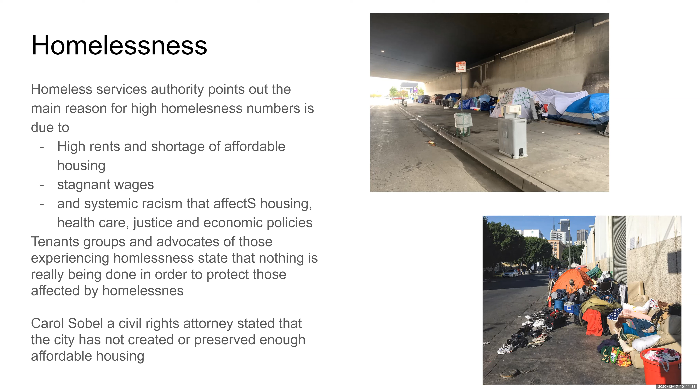The Homeless Service Authority points out that the main reasons for homelessness are high rents and shortage of affordable housing, stagnant wages, and systemic racism that affects housing, healthcare, justice, and economic policies. Many tenant groups and advocates for those currently experiencing homelessness have said that nothing is really being done to protect the homeless. That's why we came up with this idea, because we want to help those in need and those that really need a home.

These are just some stats showing where homeless people are sleeping. Most of them are sleeping out in the open, in emergency shelters even though there aren't a lot, in motorhomes, vans, tents, and cars. The LA County homeless population has increased drastically.

I'm going to go ahead and talk about our inspirations, what drove us to come up with the design that we came up with. The first one is the Eames House, Case Study House number 8.

Case Study 8 is one of roughly 24 homes built as part of the Case Study House program. The architects are Ray and Charles Eames, the style is mid-20th century modern, and the location is Pacific Palisades, Los Angeles, California. The houses were built and furnished using materials and techniques derived from experiences of the Second World War.

I believe that relates to us, because in a way a lot of the people who are homeless want a home, and we should help them equally, because I feel everyone is equal and everyone deserves to have a nice home. Like Professor Oliva has said, just because it's cheap doesn't mean it doesn't have to be designed well. We have the ability to do that, and I feel like this is a great example.

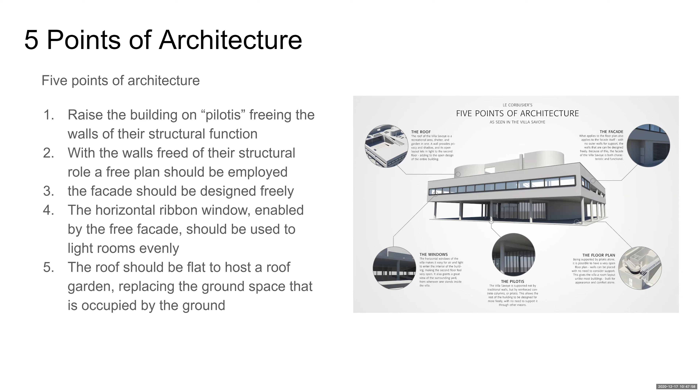In addition, this is a great example. The Villa Savoye is a true demonstration of the 5 points of architecture because it basically has the pilotis, the window, the roof, the roof garden.

This house was completed in 1931. Its main living spaces are raised off the ground. The lower level is dedicated to the maintenance and service programming of the house, and it is a machine for living in.

So another concept we learned during the class was biophilia, and I feel like this is the most important one we learned. What is biophilia? It is the connection between a building and nature. Biophilic design helps reduce stress, enhance creativity and clarity. It is a relationship that is essential for us to sustain our health and well-being.

The economics of biophilia estimates that providing American hospital patients with views of nature can save up to 93 million per year. It is a combination of science, design, and touch.

There are many examples of biophilia, and some of these designs were incorporated into our multi-unit. The first one can be direct physical ephemeral presence of nature in a certain space or location: plants, flower beds, butterfly gardens, water features such as fountains and aquariums, green walls, and vegetable roofs.

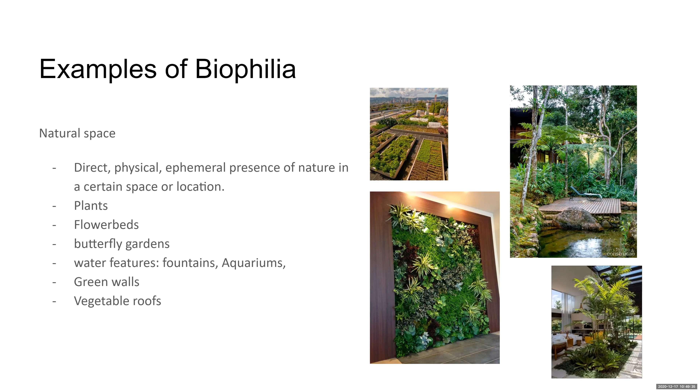The visual connection with nature is basically a view to elements of nature, system, and natural processes. Spaces have a view of nature, natural systems, or living elements. It helps reduce stress, increase positivity, emotional function, improve concentration, and expedited healing rates. And it obviously will not bore people with the view that they're having.

So our multi-unit—this is where we all kind of gather, we put everything that we learned throughout the semester and we created this.

Our multi-unit is either 3-4 complexes, or 4 on a site of 150 feet by 50. Each unit is 30 feet by 25. Each complex has 4 floors.

First floor consists of an area to exercise and entertainment. Second floor consists of the kitchen, half bathroom, laundry, living room, and dining room. Third floor consists of 2 bedrooms, a full bathroom, an office and balcony. Fourth floor consists of an entertainment area and a roof garden where vegetables can be grown.

All of the units are connected by a CMU wall that will also be a green wall. The units all have prefabricated, customized green curtain walls.

This image shows what we would be picturing for our multi-unit if it actually was built. For example, we can have a balcony with plants, something that can be like an escape room for people to get out and enjoy nature, because we live in the city and don't get a lot of that. I feel like if we can bring it to our homes, it would honestly make a difference.

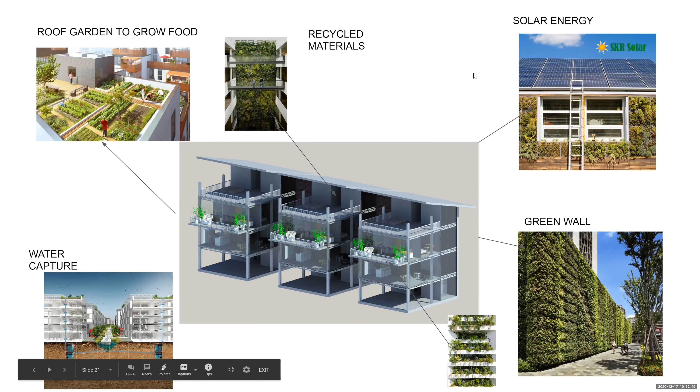Our next task is to consider the different types of multi-unit houses. With us is Brooke.

Thank you, Professor. My name is Brooke, and earlier we discussed the multifamily housing unit in depth based on our project. Right now we'll look at the types of multifamily housing units. Let me start by explaining what a multifamily housing unit is.

At a municipal level, a multifamily housing unit is also called an MDU, referring to multi-dwelling units. A multifamily house is a space composed of multiple separate housing units combined in one or several buildings in a single complex.

So I'll move into the types of multifamily housing units. The first is a duplex. A duplex is one building divided into two separate living units, as you can see on the plan. They have separate entrances, and there's usually no common area inside. Each unit has its own garage, its own space arrangement, and its own living areas.

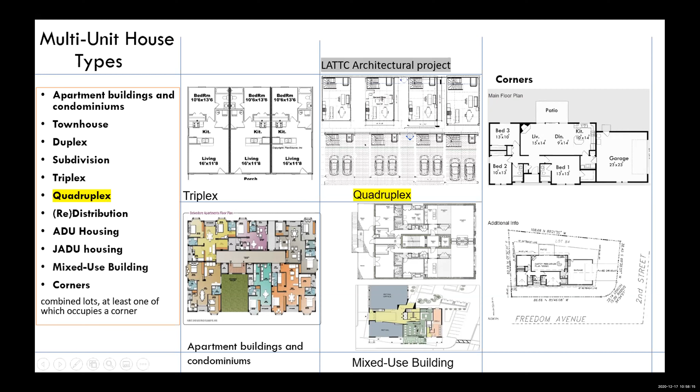Similar to this, we can move to redistribution based more on the units and their classified names. Thank you very much, Brooke.

Thank you so much. Now we're going to move to regulations, codes, and variables, and how we start with a parcel. For that, we're going to have Daniel Ramos.

Thank you, Brooke. Okay, so we're going to move to actually how you start thinking about locating your building on your site. For that, we have Edward Tenoyan.

Hi, I'm Edward Tenoyan, and I'm going to be talking about the grid and also the concrete slab on the ground floor, and how to demonstrate it on Revit.

The grid in construction documents is a series of interlocking lines, both horizontal and vertical, equal distance from each other, mostly used for organizational purposes. They help in creating construction documents by serving as a guiding line and providing precise measurements, forming the organizational system of the components.

Drawing the grid is usually the first step in the process, and it influences your entire layout in the project. During the construction phase, the grid is a reference for locating specific components on the site and attributing them with a location. For example, if you're building a structural column, you can easily locate it by referring to the grid, such as 3H.

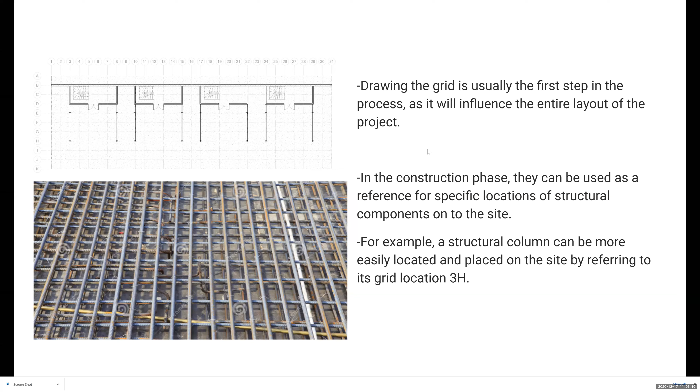As far as design goes, the Eames House, which our design is based on, makes use of the grid, which has been used throughout architectural history mostly as a pattern of organization for the designer. The Eames House uses the grid throughout its layout and the placement of structural members. The modular design is based on a grid formation, creating a system of standardization that retains proportion and harmony throughout the structure. Le Corbusier also made use of the grid and stressed its importance.

He also elaborated the use of the grid by adding an anthropometric dimension, which basically takes into account the human scale.

As far as concrete slabs go, we're going to be adding a monolithic concrete slab, which encompasses the entire property. Concrete slabs for foundational purposes are usually 4 to 6 inches thick. They're a fast and efficient way of creating a foundation. It can be poured all at once.

The concrete slab is generally positioned on a layer of sand in order to improve drainage conditions, and it also acts as a cushion. The ground underneath has to be at grade. It has to be a flat surface, and take into account that there's not going to be a crawl space or a basement, and it's not recommended for cold climates. This is a detail of a concrete slab with a CMU unit that's attached.

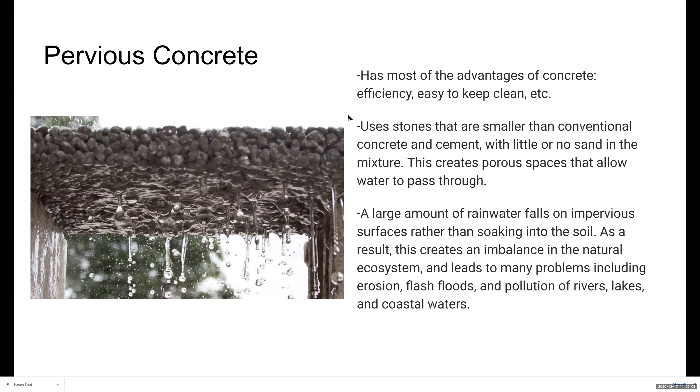Finally, because we're putting a concrete slab over the entire property, we decided to have a pervious material as the concrete, mostly for water strategy purposes. It's going to ensure that water actually penetrates the concrete and goes into the ground instead of being runoff that contaminates the ocean. There's all sorts of new technologies that create an aggregate which is more loose, that allows water to seep through instead of infiltrating our water supply.

As we have mentioned, you're not only going to learn about the concept and the knowledge of architecture and engineering, but we're going to show you how to do it on Revit.

I opened up a blank architectural template on Revit, and I'm going to start by placing the grid. We're going to make sure that we're in the architecture tab, and under datum, we're going to select grid.

Now we're going to approximate the location of our grid, and in this case, you can always edit it afterwards, but I'm going to start placing the first line in this bottom left corner where I know it's going to start. I'm going to start with the vertical lines first. I'm going to click, then drag my mouse up, and click again. Now I'm going to press the escape key twice.

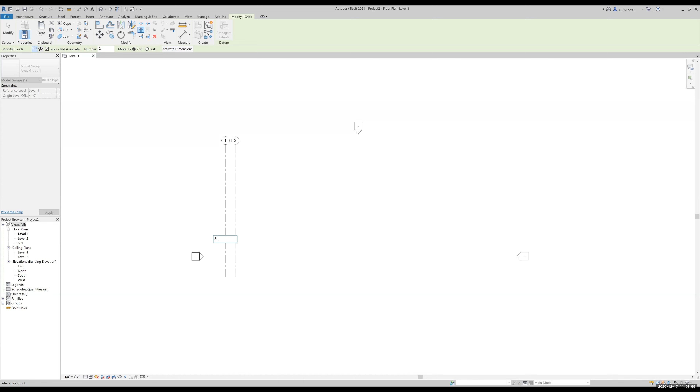I'm going to select the grid that I just created, and under modify, select array. Next, I'm going to click on the grid again and drag my mouse to the right until it says 5 feet. I'll click, and under the entry box where it says the number 2, I'm going to type in the number of lines that I want—in this case, 31. Typing that in and pressing enter, you can see that it created 31 lines.

Now I'm going to do the horizontal lines. I'll click on the architecture tab again, go to datum, press grid. I'm going to start in the upper right hand corner this time to drag it to the left. I click, drag, click again, and press the escape key twice.

Next, I'm going to change this 32 to be an A so that there's letters on one side and numbers on the other side. That makes it easier to read the grid. I'm going to click on the 32, type in A, and press enter.

Then I'm going to click on this grid line, select array under modify again. I'm going to click on the line A, drag it down 5 feet, click again, and in this case type in 11 lines.

I'm going to click outside of the grid, and so now we have the basic layout of the property.

If we want to edit and clean it up, we can do that. I'm just going to select these lines over here, click ungroup. Now when I select one of the grids, this little circle will pop up. I can move that and that'll clean it up.

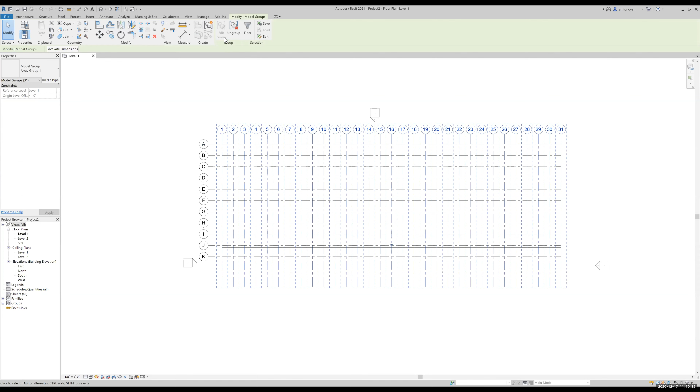I can do the same thing to these vertical lines: select them, click ungroup, click the circle, and drag it.

So now if you want the grid lines to be halftone so that they're not as cumbersome when you're drawing out the construction documents, go to visibility/graphics under the properties, click edit, go to annotation categories, scroll down until you see grids, and on the right side, check halftone, press OK.

Now I'm going to draw the model line for the entire property as well as the individual units. Under the architecture tab, under model, I'm going to select model line. Under draw, I'm clicking on rectangle, starting in the upper left. I can also change the line style to be wide lines, which I'm going to do in this case, just to make it more visible.

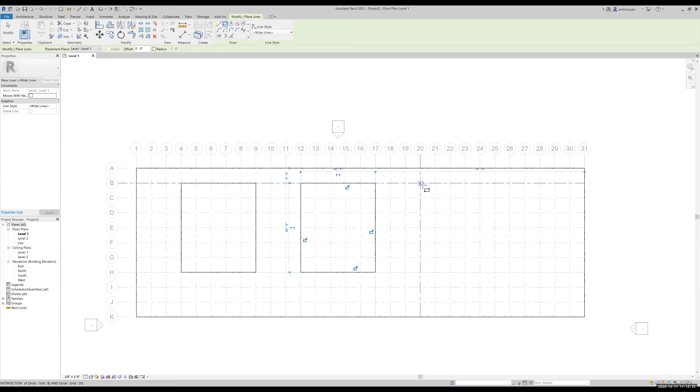Now I'm going to do the individual units. We decided on ultimately doing a 4-plex, but in this case, I'm going to do 3 units. You can see how the grid makes it easier to define the measurements of each structure, which is 25 by 30, and they're going to have 15 feet in between. It really depends on how much space you want to leave between the units and how close you want them to be.

So I'm going to press the escape key twice. Now for the slab, which takes up the entire property, I'm going to click on structure. Under foundation, I'm clicking slab. Under draw, I'm going to click on the rectangle, and I'm going to do the same thing: clicking, dragging, click again, and click on the green check mark. Now, as you can see in 3D view, there's your slab. And that's it.

Professor, you're muted. Thank you very much, Angelica.

So now that we know the parcel, we know the footprint of the building, we learned that the grid helps us locate the spacing and the modularity. Now we're going to move to number 2.

One of the things that is very exciting about our project is that we have a CMU that covers almost the entire site, because it connects the 3 units. For that, we're going to have Delson talk to us about our CMU exterior wall.

So I have put together a quick presentation on what CMU is, for those that do not understand. CMU is just a concrete masonry unit, CMU for short. They're usually versatile blocks made out of concrete that can be used both for structural and aesthetic looks. They serve both purposes. They're a great material to use because they're so versatile.

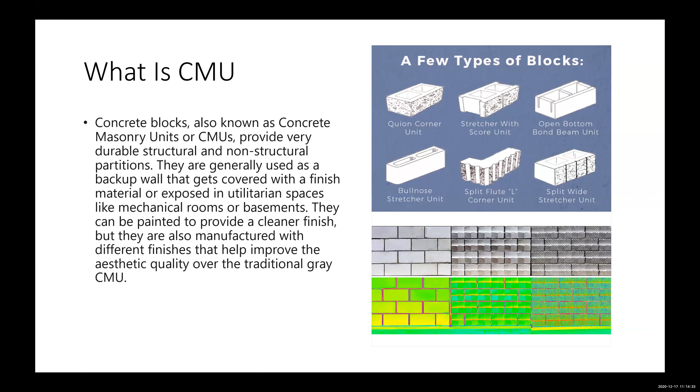Building with them is a little more tricky and time consuming, but they last a very long time. And happily, we're going to use them in this project for a big portion of the project.

So a little bit of the properties of a CMU: it is really thermal. It does absorb a lot of its exterior temperature and can retain temperature very well, releasing it at night and warming up in the daytime. So you can keep your interior temperatures more warm without having to actually have AC or much ventilation. It's really good for insulating. It does not mold, it does not rot, so that's why it lasts so long.

This CMU wall will be placed near our elevator, which works perfectly there because, as it says here, CMU is fire rated. This means it is 2-hour rated for fire protection, so it takes 2 hours for fire to get through the CMU, and it is by code that we will need that for our elevators.

Where I got our CMU is from BIMsmith Market. This is a great website that you guys can go to, where you can get free CMU add-ins to your project. I didn't write it down, but I used Oldcastle. They are a company that has insulated CMUs as well, so I thought it was a good addition to our project because it will add another layer of insulation. BIMsmith is really easy to use, free to download, and has a great variety of not just CMU, but appliances and other crucial components for your project.

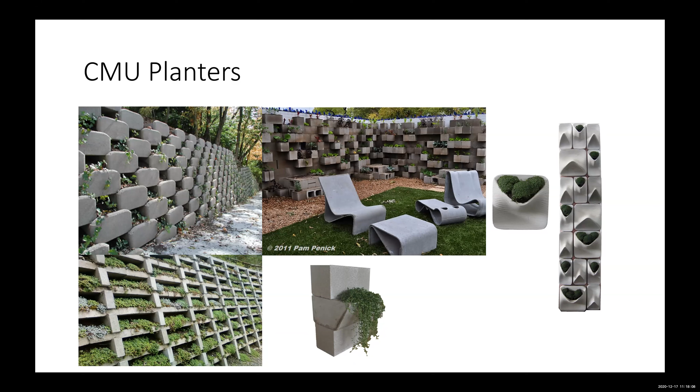Now we're going to learn how to do it on Revit. As you can see, CMU can give us texture, colors, patterns. We can create niches and openings. And now this is the way you would do it.

In this project, I have already brought in this CMU wall, which has already been fitted with texture and the CMU that we will be using in this project, as you guys can see. But I will show you guys how we can input it.

If I click on the CMU here, we can start a new one. So we're gonna start a new one from here. I'm just gonna duplicate this so I do not override my generic that I have in our files. And we're gonna go here into the structural. As you guys can see, we only have structural and the thickness. We have no actual material used here. So I will be actually adding this in.

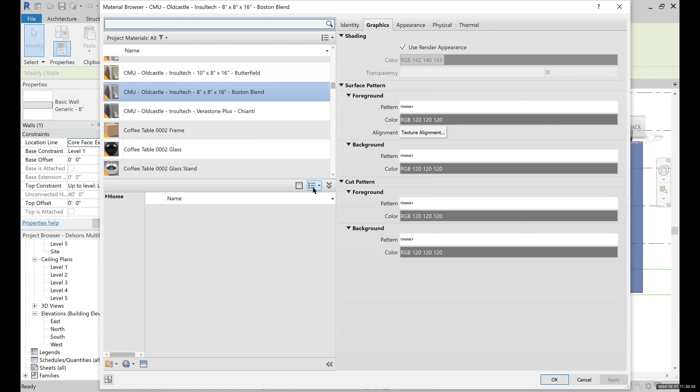I will click on these three little dots, which will open my material browser. Here we have the three different CMUs I have brought into the project that we can use. But if I would not like these three, I can come down here and click on CMU by the company, by Insultech. I have a huge variety of CMU here - about over 150 different types, which all have the same properties. They're just different colors and different types of sizes.

In this project, we're gonna use the Boston Blend. So I have already selected this material. Then I'm gonna go to graphic, go to appearance, and see what it's gonna look like. This one's more of a gray pattern, a more generic look, but I'll press OK. As you guys can see here, it has inserted the material that I want, and then I just press OK, OK again, and it should be in place.

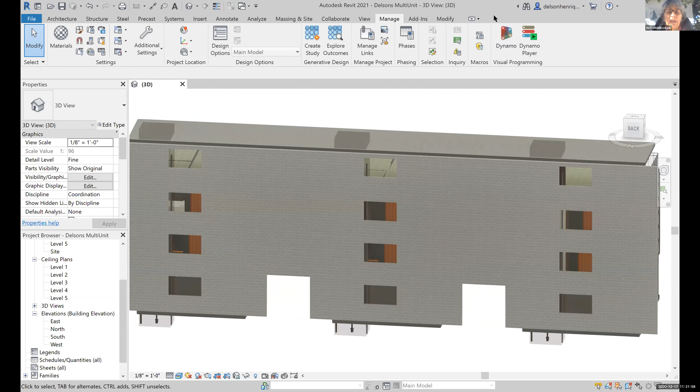Okay, so thank you so much, Delson. Here you can see it on 3D, but I'm gonna go back to Edward and I want you to see the steps. So Edward, do you mind bringing back your slide?

Because there's steps: one, you do first the grid, then you do the footprint, the parcel, then you do the footprint of each building. And then the next step is to draw the CMU. So Edward, can you draw the CMU? Yes.

So under the architecture tab, we're going to go to wall. And there are many types of walls. We can see here that one of them is a generic 8-inch masonry. So I'm going to click on that.

Next, we wanted the wall to extend out from the units a bit. So we're going to click over here under 3D, click, drag it, and it's going to encompass all of the units. Put it over there, click, hit the escape key, and now we can change the top constraint. In this case, we're going to leave it like that because after we set the levels, we'll be able to edit it. But you should be able to see it on the 3D view now. And there it is.

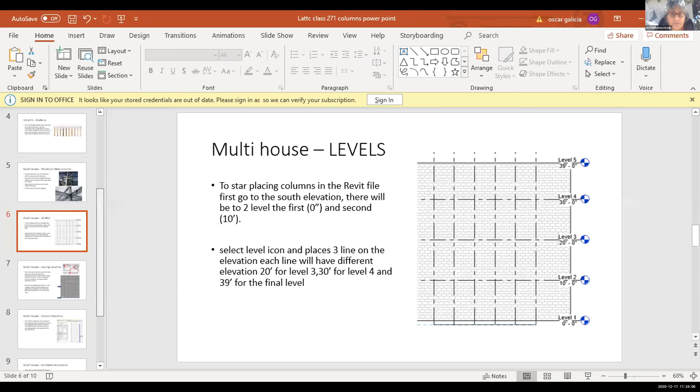Columns. Columns are frequently used to support beams or arches on which the upper part of walls or ceilings rests. Columns should preferably be located near the corner of a building, at intersections of beams, or in walls.

Start with the column base, where the column transfers and attaches to the foundation with an anchor bolt. These bolts come in various shapes and sizes. Because they are embedded in concrete, they need to be embedded accurately. Setting plates are used for this purpose.

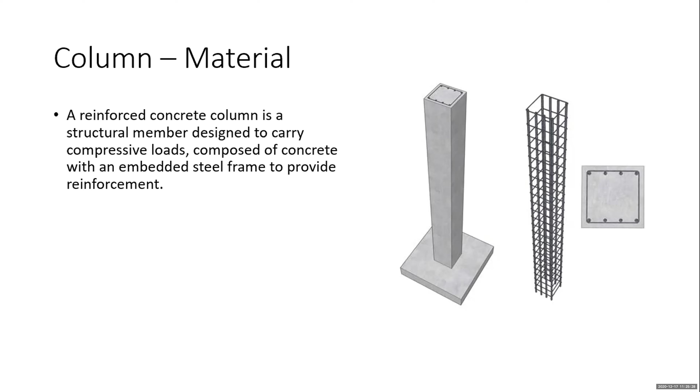The next is wood columns. Wood columns are best used for porches. Ultimately, even though there are various nice custom fiberglass and vinyl options, they won't be able to come close to the same level of detail as wood columns.

And these are some references for what I'll do in the Revit housing.

If you can stay on this for a second, so you can see the levels—that's what we were talking about when Delson and Edward were placing the CMU. So the CMU in this case is 40 feet. I think ours is going to end up being 33.

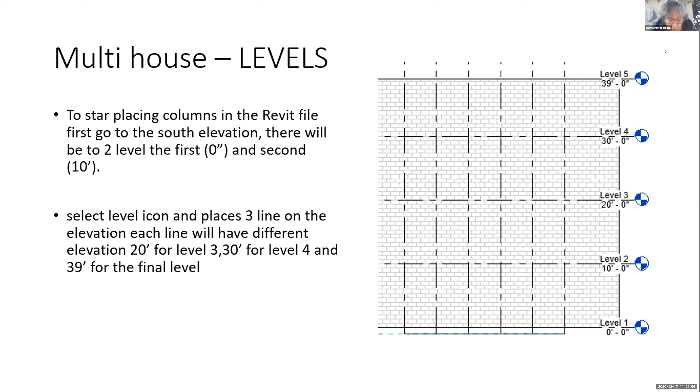Perfect. So now let's move to Revit and show how we place the columns. Okay, that was the other steps, but let's just move on to Revit.

So from the floor plan level 1, you want to go to the south elevation view. And from there, select the architecture tab, go to levels, and select levels.

And what you'll do here is place 3 lines. I like to place them right next to each other, identically, like this. 1, 2, and 3.

Next, you'll press the escape key 2 times and head towards the levels. You'll place the levels on these lines by selecting on them. The first one is going to be the third level.

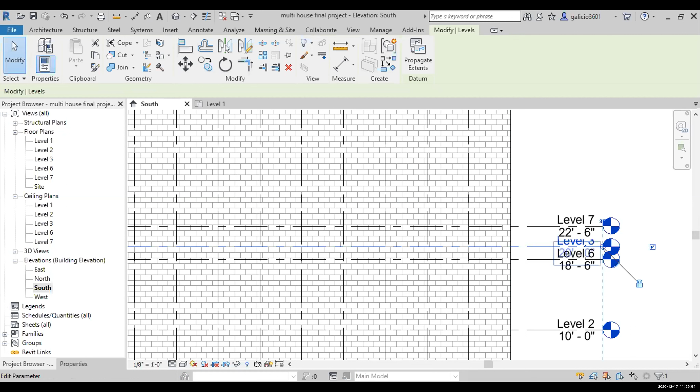The second one will be level 4, and this one will be 30 feet. You can rename it as well, as level 4, and it'll ask, then yes.

And these levels are usually the top or the bottom of your slab. And since we have 3 levels plus the roof, that's why we need 4.

And the last level will be 40 feet, and you can rename this one too. Actually, there's 5 levels. Yeah, there's 5 levels. So the top level will be 40 feet.

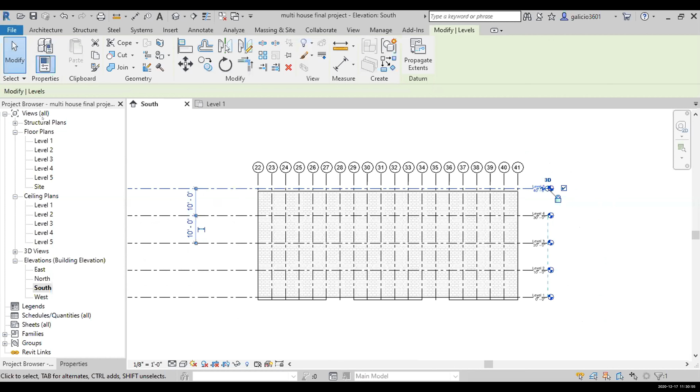Next, go back to the level 1 floor plan view, go to the architecture tab, and select column, then select steel structural column.

In structural column, go to the property tab and select the W shape column, 10 by 33, and you'll place it on the edge of this view.

Notice how right now we have it unconnected, but you can have it connected instead. So we want to talk about that a little bit too. Okay.

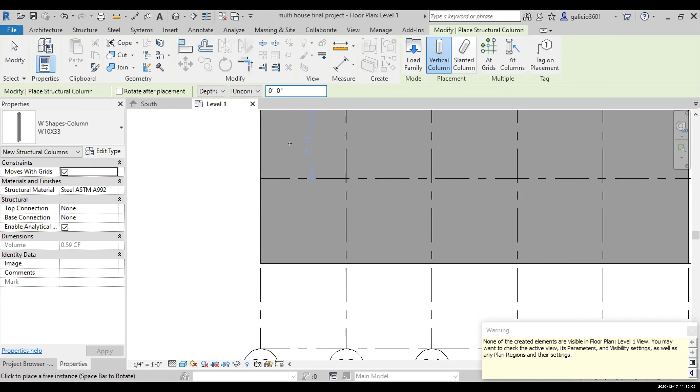I am having some trouble with mine. Yes, so you'll go to level 1. Basically a column, you have different heights, and you can have it connected to the level or unconnected. So click the arrow and put level 5 or level 4, click level 4, and that should allow you to place your column. Actually, it doesn't let me.

Probably height. Yeah, that's probably it. So that was it. We can select the level.

So the base level is gonna be level 1, and the top level is gonna be level 4. The problem I had earlier was that my column was not in the correct setting. When you select the beam, you first want to check that you have it on height. Perfect. And then you want to place the top level, the level where it's going to go all the way up to.

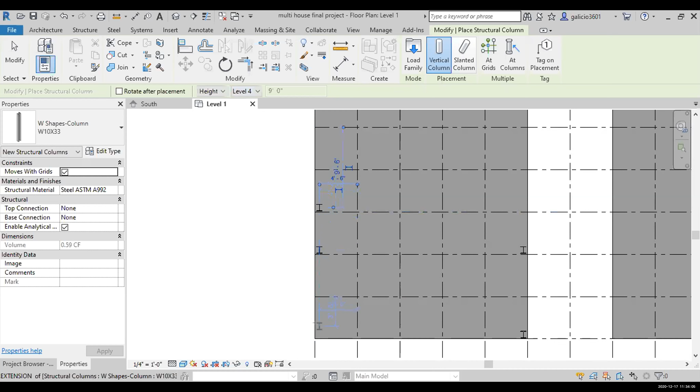Once you have one footprint, you can just copy it into the next. Let's show it on 3D. I think there's one that goes... delete that one. There you go. And delete the other one.

The reason the CMU is taller is because it's going to have the handrail, and it's also going to be protecting the roof guarding. So thank you for my presentation on columns.

Now, did you have anything on the first floor? One of the things, maybe show us on 3D how it will look. The idea here is that we study the 5 points of architecture, because on the first floor we will remove the cars on the weekend and then we can have a quinceañera, or utilize the space underneath. Can you show us a 3D view, or move it so we can see the bottom of it? The bottom, like this? There you go. Maybe we'll see it later as we put the floors with Angelica.

Thank you very much. So now we have the columns, and of course we will add columns to the other ones, and you'll continue seeing the development of it. Thank you very much, Oscar.

Now let's see Angelica. So once you have, basically you're gonna have 4 columns, and then you're gonna have open web joist. The open web joist is gonna connect the columns, and Angelica is gonna tell us about it.

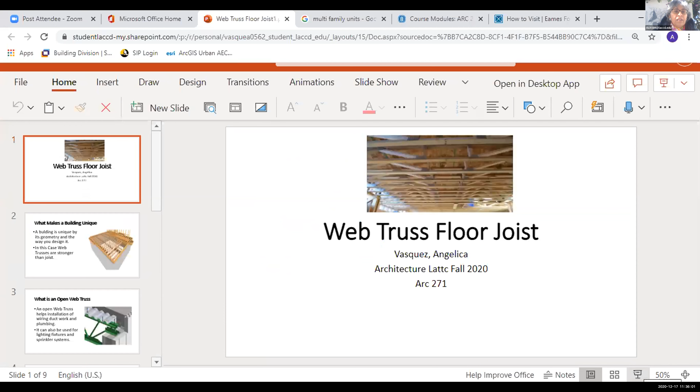Okay, this is my presentation on the web truss floor joist, for architecture fall 2020. So what makes a building unique? A building is unique by its geometry and the way you design it.

In this case, web trusses are stronger than joists. Just a little bit of web trusses and a foundation. An open web truss helps installation of wiring, duct work, and plumbing. It can also be used for lighting fixtures and sprinkler systems. That's when it goes on the roof.

Parts of the web trusses are made of chords, verticals, and diagonals. Cutting the floor trusses is very straightforward. All you need is a saw that cuts 90-degree angles.

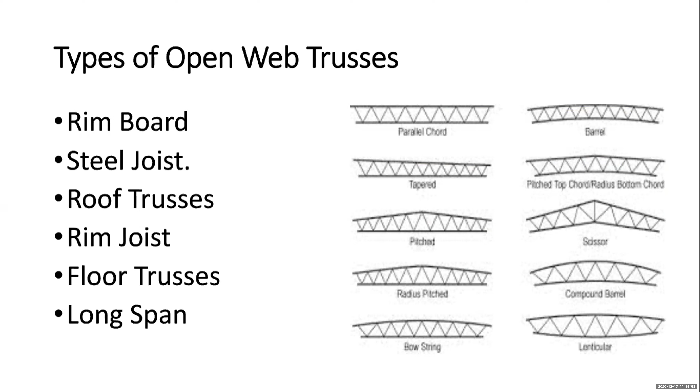These are a few of the thin web trusses. Types of open web trusses: rim board, steel joist, roof trusses, rim joist, floor trusses, long span. This is a collage of a few of the web trusses, installation, and CAD details.

Web truss in Eames house. The front of the house has an open web truss. It's over corrugated metal on the roof.

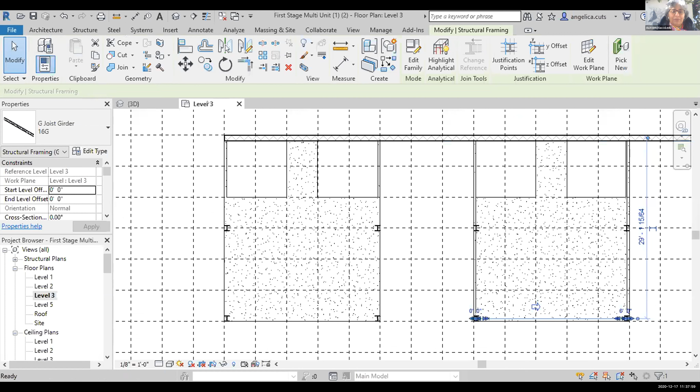Now I'm going to show you how to put it over on Revit. So basically this is my 3D view. I'm going to go ahead and start on the 3rd level, open it up. Basically I'm already on the command, so go to structure, beam. I want to pick the G joist girder, 16 gauge. Go ahead, zoom in, and start from one end.

We want to place these web trusses right in between the columns. Go ahead and hit escape once. It's okay if it doesn't connect, it'll still let you. Hit the escape key after this. Go to the other middle of the column, connect to the other one, and hit escape. Zoom in if you need to, and go up to the next column.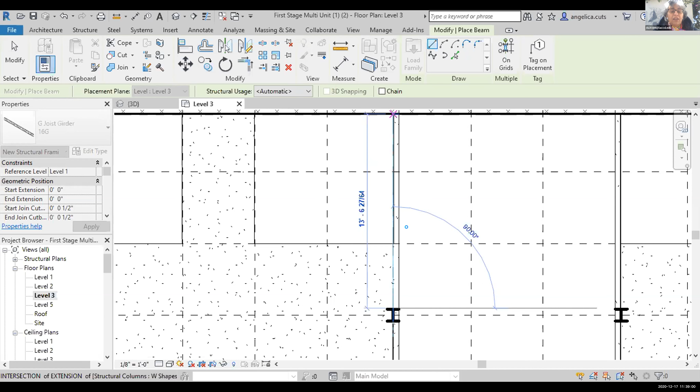And here you can see the columns that Oscar was talking about. You can see now the layout is every 15 feet. You also see right now, Angelica is showing you, she already has the floor and the opening of the elevator on the right and the stairs on the left. And we're gonna talk about that in a minute.

Basically... we lost a little, there you go. Your voice was out for a second. Sorry, Professor. So right here, it's on 3D. The web trusses are here.

So I'm gonna go ahead and add my slab. So I go back to my model of level 3. I go to architecture and I click on slab, or is it structure slab? And go ahead and go to my line command. Make sure you're on your level 3. And very good, go ahead. And I want to zoom out.

Zoom back in, and we're gonna start right here. I think it's just right here. So I'll go ahead and start here. This one doesn't start there. So let me hit the escape key and it starts more over here. So let's go here, start here. Go ahead and go down. You kind of just trace where you have been. It's not there yet. So let me go ahead back to the line, and here we go. Now we're off.

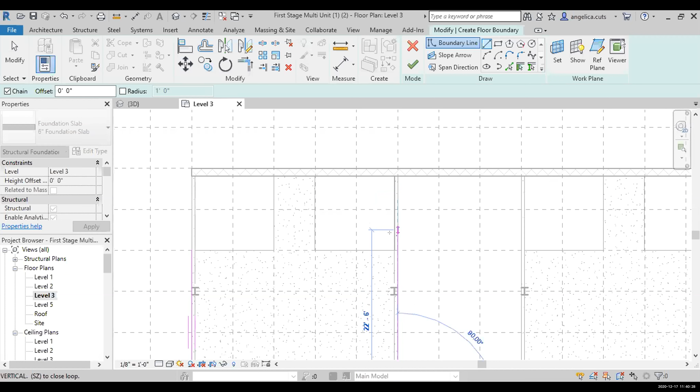Okay, go ahead and just go over the outside. You want to use the outside for this one, and want to bring it all the way out here. From here, you go just to your openings. You create your openings. You go 9 feet. You go 5 feet. Every space of the grid is about 5 feet. So right here, we just want to make sure we're closed. When we're there, we want to hit the check button, and the check button will give us our slab. So this is our slab right here.

And let's go ahead and look at our 3D view. And this is a 3D view. So that gives us our slab with the web truss. Very good job, Angelica. And then what we did on the right now, you're going to hear about the elevator, and on the left, you're going to hear about the stairs. So now you can hear where our columns are, and then how the open web truss connects to the CMU. Do you have a detail again of how the web truss connects to the CMU?

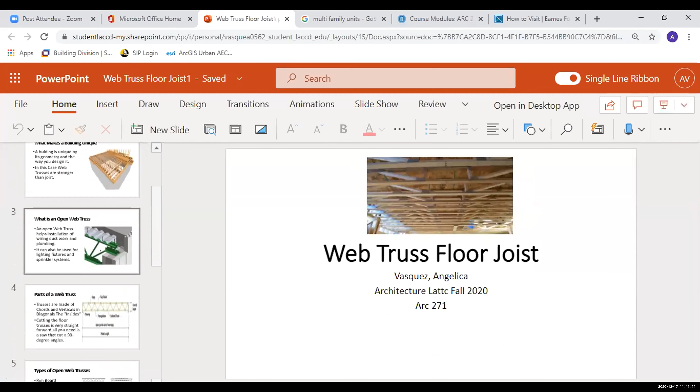So these stages you're seeing here are very similar to the stages of construction. Best detail I have right here, it's this one right here. So is it this one? Okay, yeah, that's a good one. That's a good one. So there you can see the open, it just connects from here. These are the web trusses right here, corrugated metal, and this is the pour over concrete and insulation. You bolt onto the CMU wall, and you go all the way around and connects to your curtain wall and everything right here. Perfect job.

Very good job, Angelica, thank you. So now you guys, as you know, now we have the floors, we have the open web truss, and this is a similar way that you will build this building. It's almost like a process of construction. So now we're gonna add the stairs and add the elevator, but before that, we gotta protect it. We gotta protect it. So now we're gonna add the roof. And the roof can have different shapes and sizes. And for that, we're gonna ask Erica to tell us everything about the roof. The roof will protect the stairs and the elevator, and it could probably extend into a canopy. And with that, we have Erica. Erica, you wanna tell us everything about the roof?

Go. Thank you, Erica. So tell us all about roof.

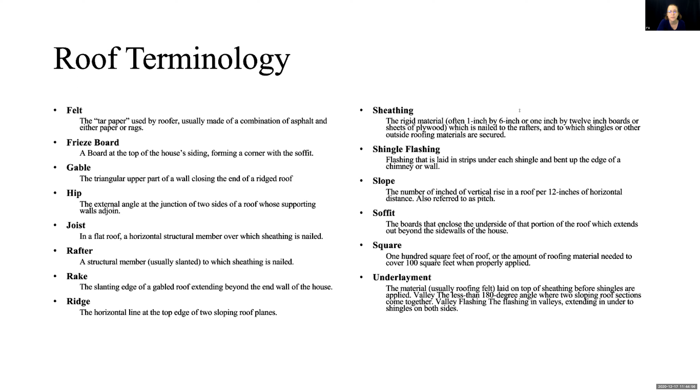All right, so these are the different parts of the roof that I'm going to go into detail about. There's all kinds of roofs that you can pick from, as you can see here. There's different materials, various colors that you can make for your roof.

And for the roof, we have green roof, and what that means is that it provides stuff for roof gardens, and it reduces storm water runoff and helps cool the roof and the building overall. It really reduces heat island effects and extends the expected life of the roof's base material. So it really provides a lot of structure and all of that.

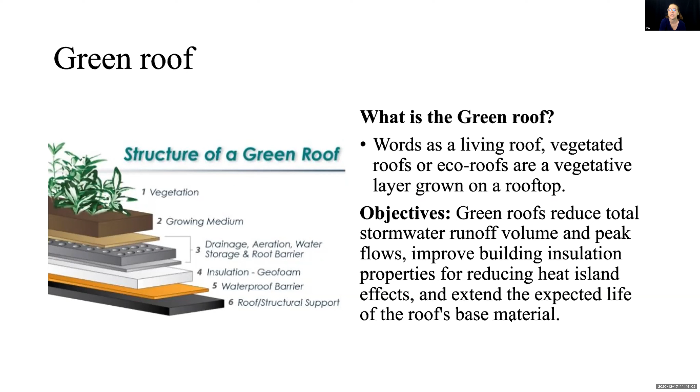And now, like the other ones, she's gonna show us how to place the roof on our multi-unit. So you could have a roof for the entire building, or you can have a roof on each of the units. I'm not sure which one Erica has chosen. She's gonna open Revit and show us how to place the roof.

The roof also can have different thicknesses. In our case, we're gonna put solar panels and photovoltaics so we can produce our own energy. We could also have skylights above the stairs so they can be very bright and light.

We're gonna make the roof here. Again, you can make any kind, and right here, you set up the corner. Right here, you start from the corner.

And trying to find in here, hold on 1 second. I might have hit the wrong thing here, 1 second.

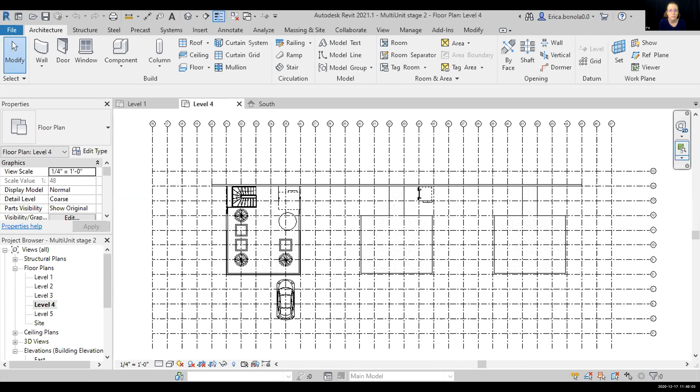Okay, so you want to set up the structure for it, the walls, because the roof connects at the corner. And then you select the different levels here. You can see that. And then you drag it.

So yeah, as you can see, I'm dragging with my cursor starting from the corner at the intersection. Or maybe it's something wrong that I'm doing here, 1 second. Okay. Oh, it froze.

I think she was saying that the size is up to you, whatever size you want to use. All right, and after that, you have the overhang, so or offset. And then you want to put that so that they connect up top.

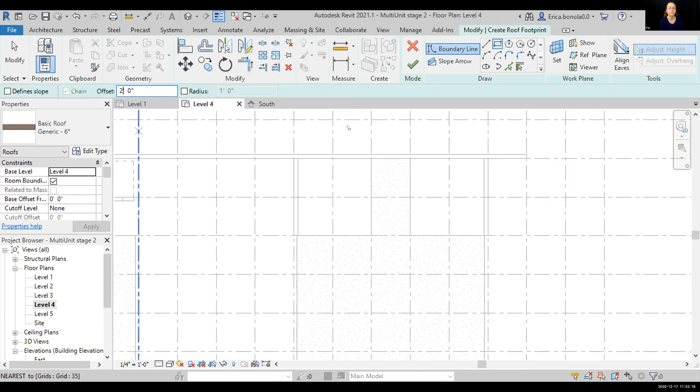As you can see here, I'm dragging this and I'm clicking on the south elevation. And it's important to make sure you're doing this on the correct level. This is the top level.

And going into 3D view. Loading.

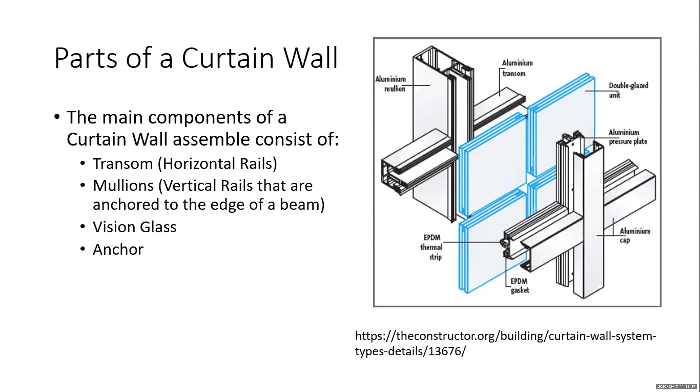So the four main components of a curtain wall include the transom, which are the horizontal rails, the mullions, which are the vertical rails that are anchored to the beam, the vision glass, as well as the anchor.

And there are two main types of curtain wall systems. So the first one would be the stick curtain wall system. These walls are installed piece by piece. And we have the unitized curtain wall system. These systems are made of large units and are erected on the building facade.

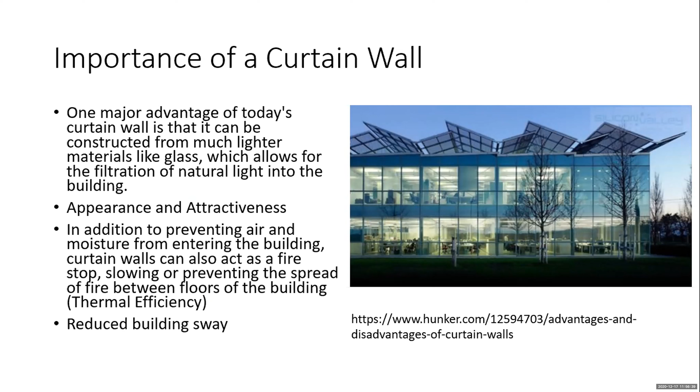One major advantage of today's curtain wall is that it can be constructed from much lighter materials such as glass, which allows for the filtration of natural light into the building, adding to its appearance and attractiveness. In addition to preventing air and moisture from entering the building, curtain walls also act as a fire stop, slowing or preventing the spread of fire between floors, provide thermal efficiency, and reduce building sway. So curtain walls have the primary purpose of keeping air and water out of the building, essentially acting as both a buffer and an insulator.

Glass curtain wall systems can provide added structural stability for tall structures, reducing sway to protect against high winds and ecological events. These curtain walls also give a clean, sophisticated, and unique appearance, which is now associated with contemporary design.

A little bit about curtain walls inside the Eames House: when looking at the structural elements made of steel, the Eameses wanted that steel performance to be visible and recognized. A majority of the home's perimeter is made up of windows, providing an outward connection with nature. The placement of the different types of glass served a rigid purpose, but was sometimes an additional aesthetic bonus. In terms of aesthetics, Charles noted that the addition of glass and reflections restored transparency and added double images that become characteristic of the building. He also made the point that the planes and shadows caused by the wire pattern in some of the glass became an essential visual feature.

A little bit about the Villa Savoye: the absence of load-bearing walls allows making windows of any shape and size. The horizontal windows cut through the non-load-bearing walls along the facade and provide the apartment with even light, as well as increase the level of illumination and increase the sense of space. It also provides the interior a lightness and offers views of the surroundings.

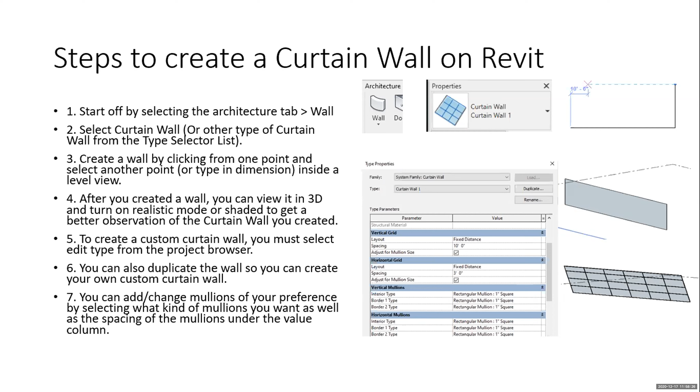Here are the steps to create a curtain wall, which I will explain thoroughly later on, so you guys can always refer back to this presentation for a better understanding. And lastly would be the facade tectonics.

Facade is an exterior wall of a building, usually the face of a building. Tectonics relates to the building or construction. FTI is a nonprofit member organization for the AEC industry and a research and education institution focused on healthy buildings and livable urban habitat. The institution's mission is to accelerate transformative change in the built environment toward common goals of resilience and sustainability. A couple of roles of FTI include expanding recognition and understanding of the integral role the facade system plays in resilience, sustainability, energy efficiency, durability, health, and productivity in buildings and urban habitat, as well as accelerating innovation and tangible improvements through strategic facade-based initiatives, and providing the industry-leading platform for building facade knowledge sharing, communication, and collaboration.

This concludes this presentation, Professor.

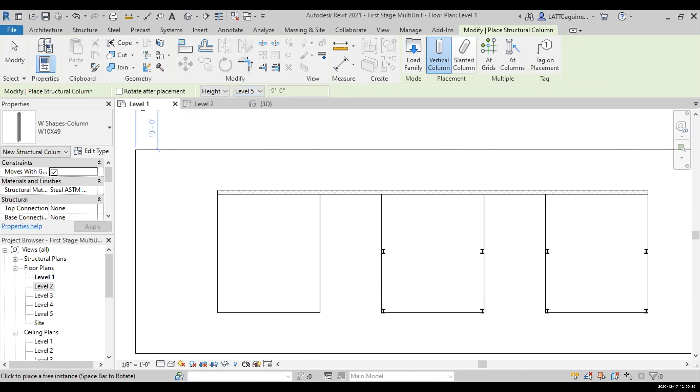Okay, let me start off with doing the columns first. Let me just jump into level 1. I'm going to look up on the ribbon and select column. For this example, if you look on the type selector list, we use the W10 by 49, so I'll go ahead and select that. I want to make sure I have height and not depth, so it goes above ground and not below. Then I'd like my placement level to start on level 1, with the height going up to level 4. It's very self-explanatory to do—just make sure your level placements are correct, and then you click and place as you go.

So just give me a couple seconds. Hopefully it doesn't freeze or crash. That's one of the things with Revit, you gotta be patient because it is very memory consuming. Correct.

As long as you make sure that your base level is level 1 and the top of it is at level 4, we're just going to kind of mimic the building on the right-hand side. Go ahead and click placement. It's a lot easier when you see these dashed lines because that's when you know it's aligned properly.

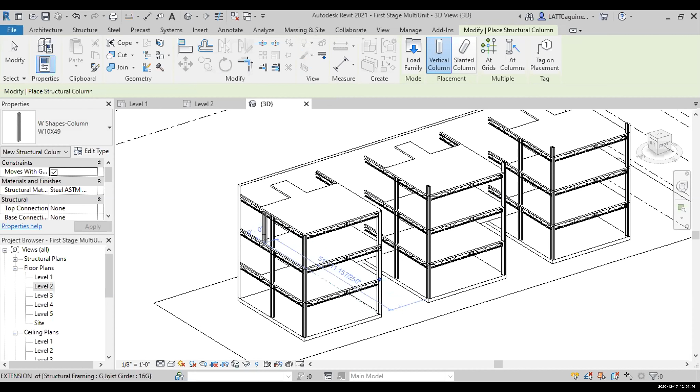After I do that, let me jump into 3D view, and you can see that I have placed all of my columns properly. So next would be the curtain walls. Let me jump back into level 2.

Going to the curtain wall, it's very self-explanatory to do. The first step would be to go to architecture and click wall. If I look under the type selector list, I have a variety of walls I could use. For now, I'd like to use just a basic curtain wall.

I would look to make sure it's at height, once again, not at depth. I'd like this to go all the way up to level 4, and confirm that my base constraint on the left-hand side in properties is set to level 2.

So I'll start by zooming in, click at the end, and then I notice that the curtain wall is going outside. All I have to do is click the spacebar to make it go inside. Zoom out, and go all the way to the end.

It's very self-explanatory, you just kind of click and place as you go. If I go to my 3D view, I can confirm that I have my wall set right in place. If I cycle through the tab, you can see that I have my curtain wall in place.

In order to create a customized curtain wall, it's fairly simple. I'm going to highlight the curtain wall, click edit type, and then I'd like to duplicate it. That way you can save your own customized curtain wall.

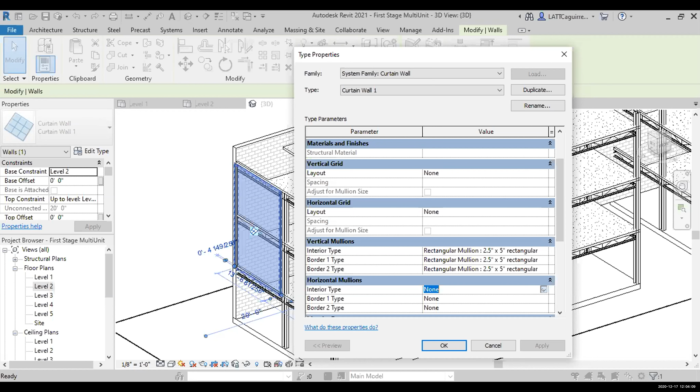Then let me click apply, and now you can see that I have the mullions around the perimeter of the curtain wall. I could do the same thing with the horizontal mullions. Once again, just using the edit type, you can always add or change the mullions or the transoms, as well as adjusting the spacing.

To go over real quick, the spacing, you want to look on vertical grid—yeah, it's right here. Give me one second. So I go to fixed distance, okay, there we go. You want to change the layout to fixed distance, so you can activate the spacing for the proper column.

Once you go to the value column, you can now adjust the spacing. Just for example, let's make it an 8-foot spacing, and click apply after changing it. Now if you look back to the 3D view, you can see that I have added 8-foot spacing.

Let me do this to the mullions too. I go to the value column, change from none, and change it to fixed distance. Let's make this one 10 feet, for example. I click apply, and now you can see I have added a mullion going straight up and down.

You can go ahead and change this to any type of dimension you want, so I'll leave this for now and jump straight into the roof. In order to add the roof, I'm going to jump all the way up to level 5, and let me just zoom in real quick right here.

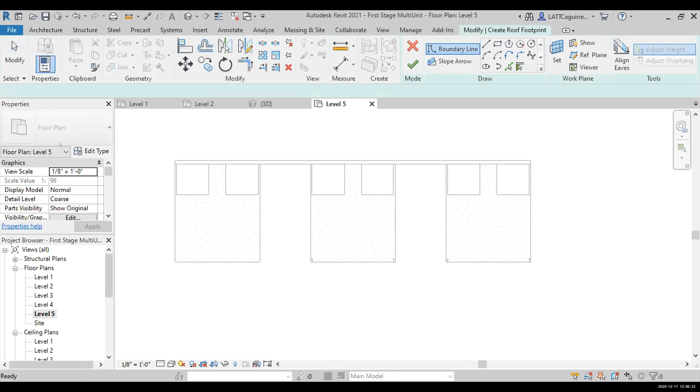I'll start off on the roof by going to the architecture tab and make sure I click on the roof inside the ribbon. I'm just going to use a generic 9-inch roof, I think it's very easy to use.

And then you just click at the endpoint, and we're going to go all the way to the right. I'm going to extend this out so we can have a 5-foot overhang on the right-hand side as well as the left. Once I get to the edge, I could just type in 5 on my keypad and click enter.

And I'm going to have it come down, I believe it's 15 feet. Someone correct me if I'm wrong. That's great, and we're drawing a flat roof, which is perfect. So now I can see it's at 110.

So 110 plus 5 would be 115, so I'll go 115 horizontal. Then I should go up until I see this dashed line, so that's when I could confirm it is even with the other horizontal line.

In order to complete a roof, like I mentioned before, as well as floors, you want to make sure it is a closed polygon, because if it's incomplete, you will get an error. So after that is done, I'm going to click check.

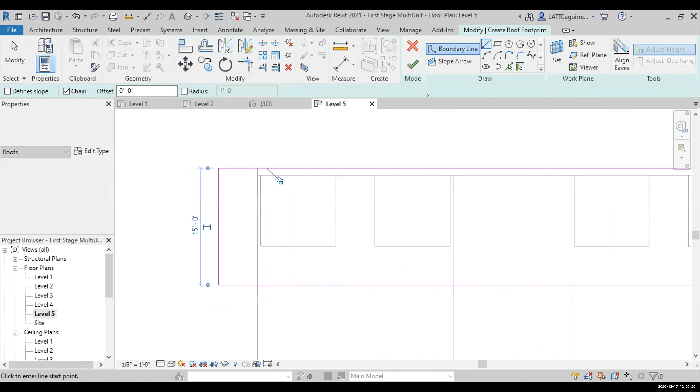Would you like to attach? I'm going to click don't attach for now. And if I go back to my 3D view...

You can see I have added the roof, but for this example, the levels have to be adjusted. So all I have to do is just change the level, because for this model I think it's 33 feet, which is not a big deal. All I have to do is make it 36 feet. I'll see if I could do it real quick.

Go back to my 3D view. What happened is that the third level doesn't exist, it's just the first, the second. And then we just need to extend the CMU too. You can either extend it by pulling this all the way up to make it even.

And as you can see in my 3D view, I have added my roof, the curtain walls, as well as the columns. And to conclude this presentation, I would like to end off with this very powerful quote.

Now, this is not the end. It is not even the beginning of the end, but it is perhaps the end of a beginning. So thank you everybody for watching my presentation, and best of luck to everyone.

Thank you, fabulous work. Thank you so much. You have become an expert. Very good, Matthew, very good.

So now we're going to move to Adriana. Adriana is going to tell us everything about elevators and interior walls.

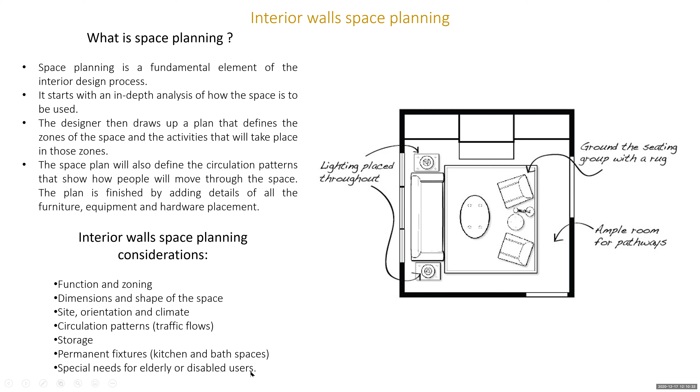Why are interior walls important? Walls define living spaces, offering privacy for bedrooms and baths, directing foot traffic, and creating functional floor plans.

Some important facts to consider when doing interior walls are load-bearing versus partition walls, wall height, wall thickness, framing standards, and wall construction methods.

Sorry, I don't know. Can you see my screen? I don't know, something happened. Professor, you are muted. Yes, you can see it, no worries. All right, okay.

Load-bearing versus partition walls. Interior walls consist of both load-bearing walls and walls that don't bear weight, called partition walls or non-load-bearing walls. Both types employ similar framing standards, but a load-bearing wall is typically located directly above another load-bearing wall, a beam, or a structural column.

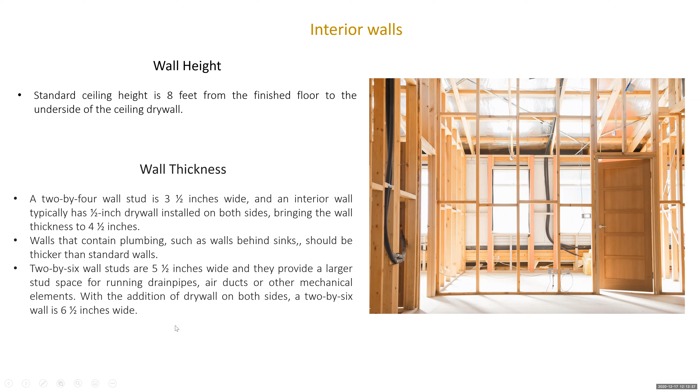Walls that contain plumbing, such as walls behind sinks, should be thicker than standard walls. 2x6 wall studs are 5.5 inches wide, and they provide larger stud space for running drain pipes, air ducts, or other mechanical elements. With the addition of drywall on both sides, a 2x6 wall is 6.5 inches wide.

Framing standards. In a standard interior wall, correct stud spacing is essential. Standard studs are 16 inches apart, measured from the center of one stud to the center of the next stud.

For second story load-bearing walls, which sit directly over load-bearing walls on the floor below, the best practice is to align the wall studs from one floor to those on the floor below. This means that the wall studs on the floor above will be directly over the wall studs on the floor below, even though horizontal wall plates, floor joists, and subfloor materials separate the walls.

Now we're going to move into Revit to see how to actually place the walls and the elevator. Fabulous presentation, Adriana.

So doing walls is very simple. You go to the architecture tab, you select wall architectural. Make sure that your location line is finish face exterior and that you are in the correct base constraint. Right now I'm going to do the walls for level 1, and also make sure that the top constraint goes to level 2. So the wall that I'm going to do is from here to here, 10 by 10.

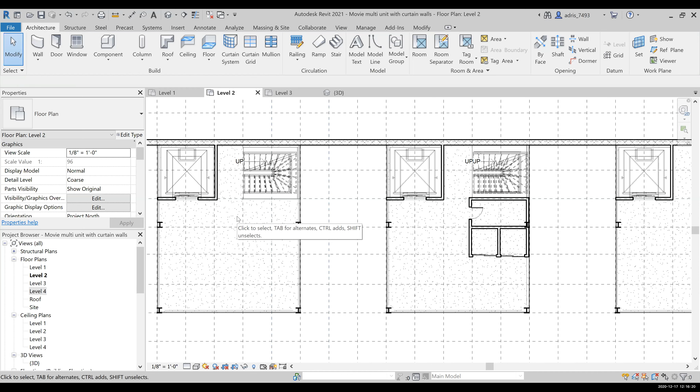Now let's go to level number 2. Here I'm going to do the walls for the bathroom, the storage, and the laundry room. So again, I go to architecture, wall architectural, location line finish face exterior, base constraint level 2, top constraint, make sure it goes to level 3. You want your walls to go up to the level above. So I'm going to do a rectangle.

Now I'm going to divide it, and I'm going to start placing the doors. So for the doors, you go to the architecture tab, you select doors, and I'm going to use this one for the bedroom. You can use the space. Why don't I rotate it?

Notice how by creating a 5-foot module, we'll be able to create basically 2 aisles and the circulation in the center. So this design, the interior can actually move based on what the client requires. You're going to see more examples of this when Chris presents the interior furniture.

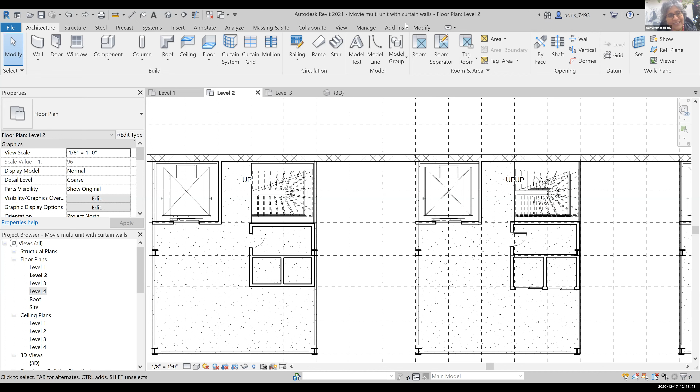At least students were able to see how to place windows and doors and the importance of interior walls. So thank you so much, Adriana. We're going to move to Erin, and we're going to learn more about walls afterwards with Chris.

Great job. So Erin, tell us all about stairs. Stairs are complicated because they are regulated by the building code. The tread and the rise, according to the building code, cannot be more than 7 or smaller than 6.5 because it can be hazardous, it can be dangerous. And then also the stepping, the tread has to be minimum 10 inches. So Erin is going to tell us how to calculate it and actually how to draw it in Revit.

Erin, please. Should I just do Revit, or should I show you my PowerPoint presentation? Well, if you have 10 minutes. Oh, yeah, I can do 5 and 5. Can you see my screen? We can.

So very quickly, just what stairs are: a construction designed to bridge a large vertical distance by dividing it into smaller vertical distances called steps. Stairs can be straight, round, or consist of two or more straight pieces connected at angles.

Some general anatomy: your tread is where you put your feet and stand on. The riser is the space in between the treads. And the nosing is the portion of the tread that overhangs the front of the riser.

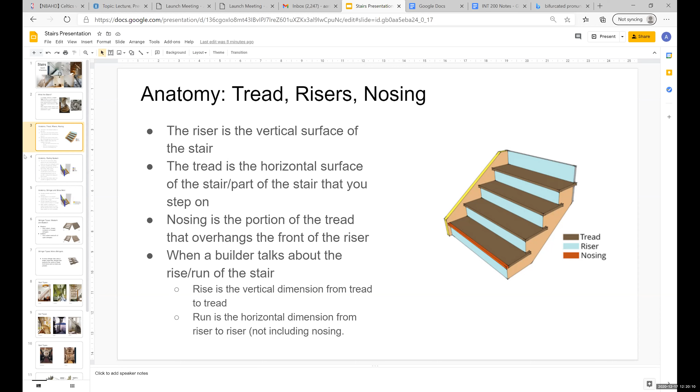Then the railing system: the post is the vertical structure that connects the stair or floor to the railing system. The rail is where you put your hands, and the spindles are the vertical structures in between the posts, there for safety reasons. The shoe is the bottom plate that the spindles sit on.

The stringer is the surface that holds the risers and treads in place. The stringer fascia is the finished surface on the inside vertical surface of the stringer, and the stringer capping is the finished surface on the top face of the stringer. The shoe mold is the molding that covers the gap between the shoe and the drywall surface of the wall below where the shoe is installed, right here.

Another stringer type is the monostringer, which uses a single beam-like stringer that supports the center of the tread from below, and no risers are present.

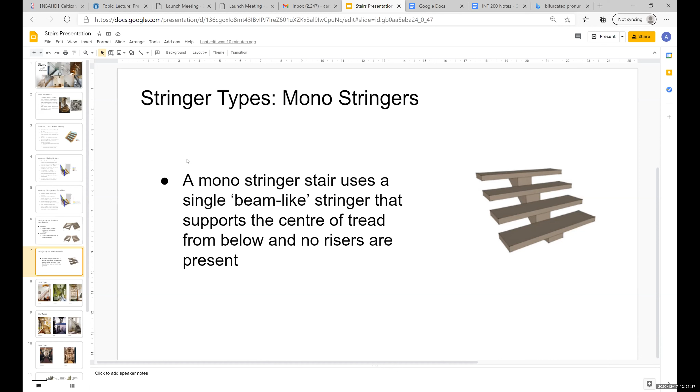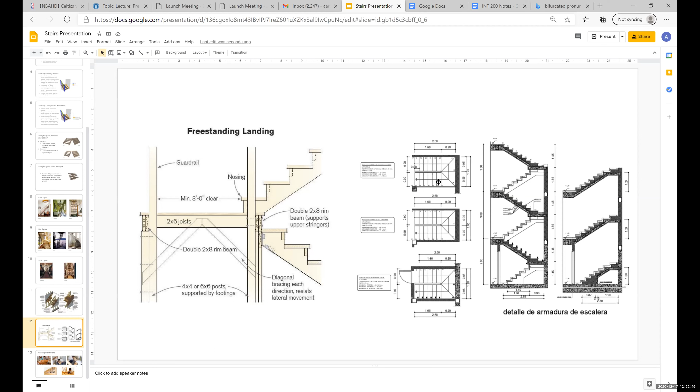Very generally, how you would go about building a set of stairs: you would first want to collect the measurements, then calculate the slope. Then you could carve out, either by hand or with a machine, where the risers and treads would go. Then you would hang the stringers relative to the right levels, install the risers and treads, and then install the staircase if need be.

So now I'm going to go ahead and show you my Revit. Can you see my screen?

The way I set this view up was, if you go up to the view tab, you can go to tile views and create this side-by-side view. So if you're working on a specific level, you can at the same time see the progress in the 3D model, which is really good when you're working on stairs.

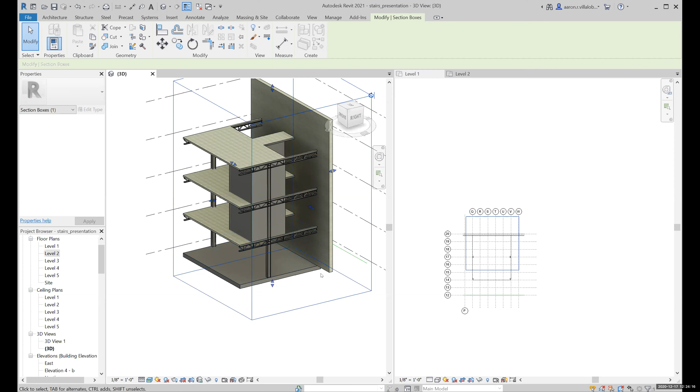Also, if you're in this 3D view, you can go to the section box and select it, and this box comes out so you can crop out whatever you don't need and focus on what you're working on. I have all the other multi-units on the other side, but I cropped them out for the purposes of the tutorial.

Here you go, so let's get started. If you go to the architecture tab, you can click on stairs. I'm gonna start off with a -3 offset, and you'll see why in a second.

This assembled stair is fine for what we're doing, but other options that come with Revit are a cast in place stair and a precast stair. I'm just gonna make sure in the component section that I'm using a straight run and having it run left. So let's get started, all right.

So I'm gonna click right here. Also, the desired number of steps that I want is 14, and that's to ensure that we have enough space for a landing to get onto the first floor. You can just click OK right here.

I'm gonna click here, and there we go. The reason why I gave it a -3 offset is so that there's space between the CMU wall and the stringer. I'm gonna go ahead and create 8 risers. So right now we have 8 risers and the desired number is 14, so I'm missing 6.

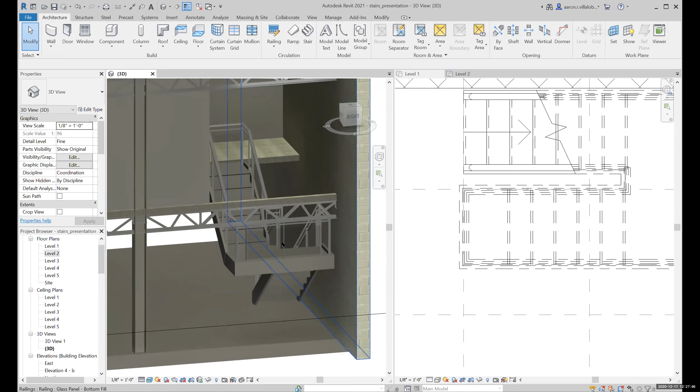Revit was bringing this up for me a lot yesterday, and I thoroughly inspected the rail and didn't see any breaks in it. But the big problem we have here is that the railing kind of loops around the landing, which is going to prevent us from getting to the first floor.

So what I'm going to do is go to the modify panel and select this split element tool. I'm going to click this split element tool, and then go to where the railing makes this 90-degree turn. I should just be able to click right here.

And again, click over here. So what I'm doing is splitting the railing into pieces. I don't think I clicked it over here the first time. Perfect. Now I'm going to click modify and zoom in on my 3D view. Now I should be able to select this part of the railing and delete that. Perfect, now we can get onto our first floor.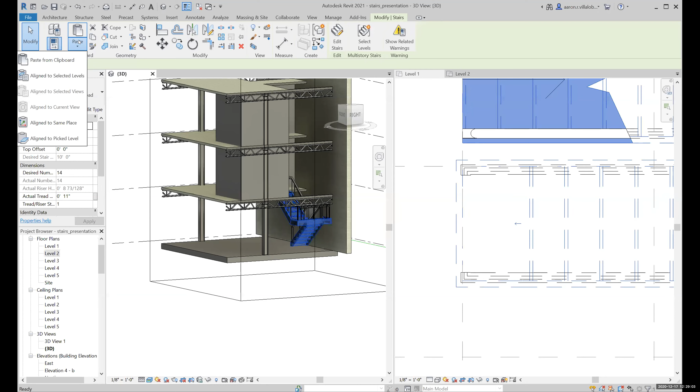Then, to put these on the second and third levels, I could just select the stair, go over here and copy it to my clipboard. Then I'm going to press paste, and select align to selected levels. I'm going to move this to level 2 and align it to level 2.

Alright, actual riser height of stairs greater than the maximum riser height specified in the stair type—we could ignore that. Then I'm going to do the same thing again: go to paste, align to selected levels, and go to level 3. The warning's probably going to come up again, get rid of that. And here we go, here are our stairs.

Professor, do you want me to edit them and add the materials? Yes, if you have some time, that'll be wonderful.

The way you would go about this is you select the set of stairs, then go to edit type. Here you see the supports, the stringers that come with the default set of stairs. You can choose to remove these stringers or change the support or the type of stringer.

If I go to this run type and press at the end, it takes me to another tab allowing me to edit the materials of the treads and risers. You select here and pick whichever material you want.

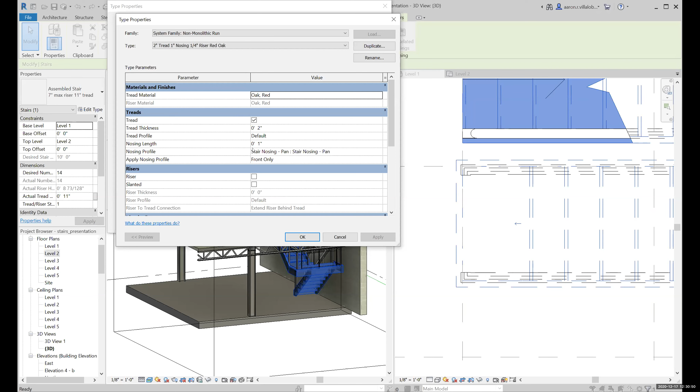To save time, I already did this and created a different set of stairs called red oak finish. The stringer is made of red oak, both stringers, the tread material is oak, and I got rid of the riser, which gives a more modern look.

This warning says the stair top end exceeds or cannot reach the top elevation of the stair. The reason is the desired number of stairs is now 18, but we only have 14, so we'd need 4 additional steps to reach the first level if we want to keep 18 steps.

If I just change the desired number back to 14, select apply, and ignore that, we should be good. There you go, that's a set of stairs.

You can do the same for all the other ones. Click on this dropdown and select the red oak finish. Same issue, so I'll make the desired number of steps 14. I'll do this again for the last one, red oak finish, make this 14, ignore, and we should be good to go.

If you want to edit the railings, you select on one. By default, Revit gives you these bottom ones: the glass panel all glass, the bottom fill, the guardrail pipe, rectangular pipe, handrail pipe, and the handrail rectangular.

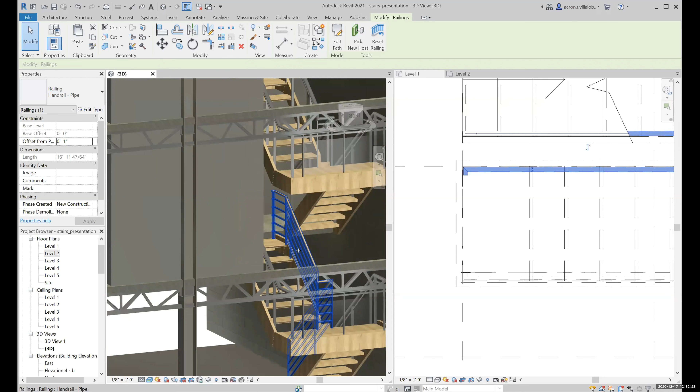If I select on the handrail pipe, I actually edited this one a while ago, but it'll give you a default version of this exact same one, so it won't have any materials.

What you would do is select the railing, go to edit type, and edit the rail structure and change the materials. The original one didn't have any materials, so I just changed them to black steel.

For the top rail, you go to type and click on the end here, then go down to materials and finishes where you can change the material. It won't have a material by default, so you click this, type in the material you're looking for, press OK, and you should be good to go.

And there we go, fabulous work. Fabulous work, very good, Aaron. Very good. So now, guys, what's next?

Hi everyone, so I'll be focusing more on the interior space, as Professor Oliva said. These are the key points I will be hitting. Adriana already hit the space planning pretty perfectly, so I'm just going to skip over that and jump right into circulation. So what is circulation?

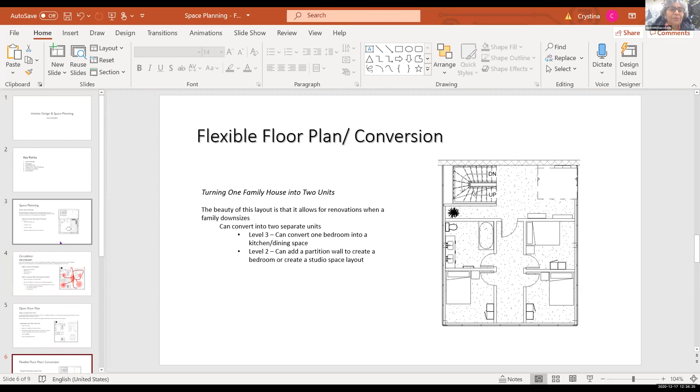Actually Chris, do you mind going back? Because I don't think she covered that. Do you mind going back? Oh really, okay yeah. Oh wait, no, definitely talk about that one you did. Okay, space planning, sure, yes, just do your whole presentation.

So what is circulation? In architecture, it refers to the way people move throughout a building and how they interact with the physical space around them. Circulation also occurs prior to entering the building, as people approach the structure. Different types include direction of movement, type of use, frequency of use, and time of use. What to consider most when developing circulation is its fluidity.

Does the circulation route clash with furnishing requirements? The size of circulation spaces may be determined by factors such as the number of people using them, the direction of travel, and crossing flows.

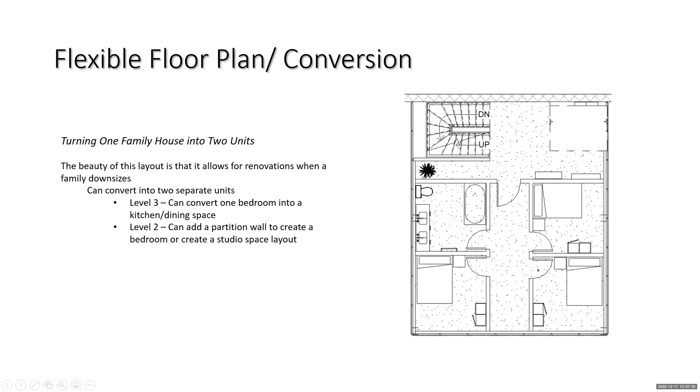So in this photo, you can see the top level, which has 3 bedrooms and a bathroom. This is what essentially can happen - you can convert from the 3-bedroom layout into a kitchen unit, as you can see here.

So also, proportion and scale in interior design. The role of proportion in interior design is super important - it's essential when selecting basically everything that comes inside the unit: the furniture, the decor, the window coverings. In residential design, scale relates to the size of an object compared with the space it occupies, while proportion is concerned more with the relationship of elements to one another.

So where do we download Revit objects? Revit already comes equipped with an English Imperial Library, where you can find a select amount of Revit objects. But luckily, Revit has an open source agreement which allows any user to create objects for their program and make them accessible to everyone.

So these are a couple of websites that are most used for free downloads of Revit objects, so that way you can furnish the interiors. That's how I'm going to start first and show you how it's done.

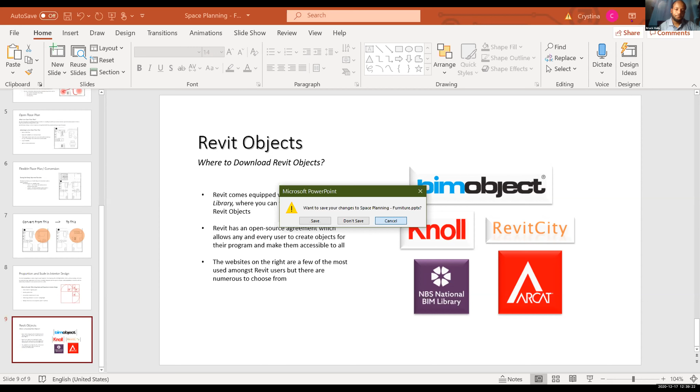So to start off, what you would do, like I showed on the last PowerPoint slide, is go to a website such as Revit City. You would type in keywords for what you're looking for, such as sofa, shower, anything you're possibly looking for. This is the sofa I chose to furnish the inside of the multi-unit. You click on download now, and it will appear here.

The best advice I can give you is to create a Revit materials folder on your desktop. As I did here, you can create a Revit materials folder and add that in there, say for furniture. After that, we'll continue on Revit, and you can do this for all of the objects that you find for your unit.

Okay, so as you get to Revit, can everyone see my Revit? Yes. So after you've loaded or downloaded all of the objects from the different websites, you can load them into your project. Sorry, I'm having the same problem Aaron had with not being able to see the top of Revit.

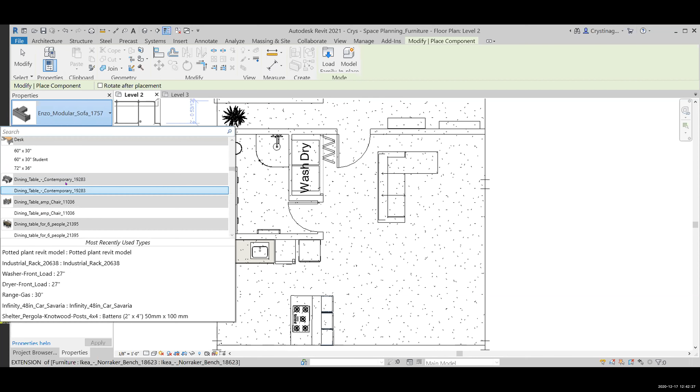Since mine are already loaded in here, I will place just a couple more to show you. So I will find the dining table. As you can see, once you start adding a lot of components, it can really stack up in here. For the dining table, same thing - you can press the space bar to change the location. I like it like this, so place it like this, and we're creating the open floor plan space.

I had already had some components loaded in here, as you can see. For the space planning, I have the washer and dryer set behind the front door so it's out of the way, taking up space from the bathroom. Also, I think it's important that when you're entering a bathroom you're not staring straight at the toilet, so I placed it in the corner so you're staring at the sink and mirror instead, which is more aesthetically pleasing. Also, for the kitchen...

For the kitchen, it's nice to break up the space with some type of furniture, such as a bar space or a table area. So I added bar stools here, and it has a kitchen stove. But you can still see that this entire space has the open floor plan that we are aiming for.

I don't know if I should place a couple more components or if it is explanatory. Yeah, it's very explanatory.

If you can just walk us through your entire building - the first floor where the parking is, and give us a view of how it will look - then first floor, second floor. Just walk us through your whole building since you will have everything completed.

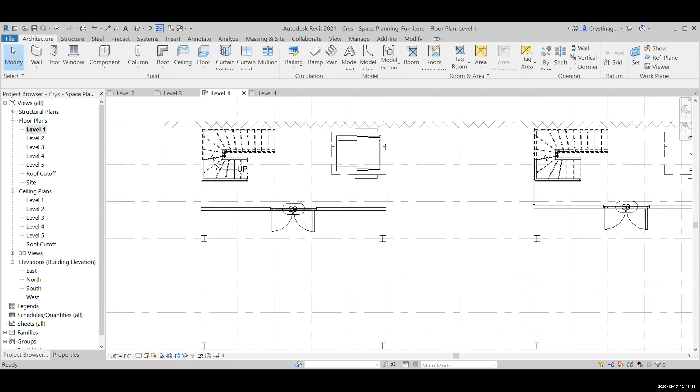For level 3, I didn't do this for that one, but for this one, you can have 3 bedrooms, or like I showed on the PowerPoint presentation, you can convert this unit into a kitchen. Lastly, on level 4, it will be the rooftop area. I haven't furnished this one yet, but I did add a pergola-like structure for shading purposes. That's what I have right now.

You can show us the 3D and then the multiple axonometrics so we can also see it in 3D. Is this your final one? This is not my final one, so if you want to give just a minute, I will.

Let's open her final one because you're going to be able to see the entire 3 units, and the most important thing is the spacing in between. The spacing facilitates a lot of interaction, either for 3 families or up to 6 families, as we saw. She's going to show us how to look at it from multiple axonometrics.

Here we go. On a day when there are no cars, you can turn it into an entertainment space. That CMU still can have a lot of openings, so you can actually also create a running track around the site. So just quickly, if you can rotate it around.

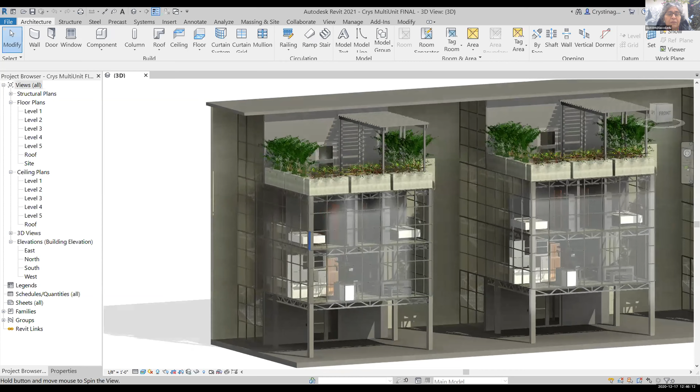Fabulous design. Again, we can have up to 4 units, so we could even have up to 8 families living, or 4. Instead of having 15 feet in between, we could have 10, and it still will be very spacious.

As we were talking about, that CMU can actually have some niches and openings, I'm going to show you in a second. So beautiful design. Thank you so much, Crys.

Thank you. We're going to ask Edward now to show us how to do a handrail, and maybe also see the roof that Crys designed, but now let's look at Edward. Edward is going to show us how to add handrails, and then after that Daniel Ramos is going to conclude and tell us all about the regulations for the parts.

It's just going to take a second because my Revit is loading. It's taking a really long time. No worries, you might want to stop the recording. So now we're almost there.

We're going to add the handrail on the roof. And here we have Edward. Hi again. So putting railing is pretty straightforward. Erin already showed how to customize rails. For now, I'm just going to do the standard default railing. We're going to go into the architecture tab, click on railing, and then it's going to show you how to make the path for the rail.

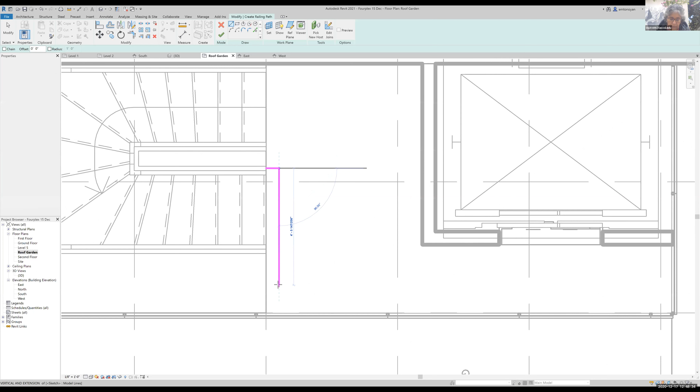Right now we're going to do the area by the stairs just to cover up this hole so people don't fall in. We're going to click at about this point, drag it out a bit, click. Once it reaches this curtain wall, we're going to click. You have to do each rail one at a time, so we're going to click the green check mark.

I'm going to go back to the architecture tab, click on railing again. Now we're going to do another path that's going to go around the actual roof. I'm just going to have it follow this grid line over here. We're going to click, drag it, click, click again, click, drag, and then click. Then we're going to press the green check mark, and it might take a long time to load into 3D view, but...

I see that you have placed a canopy, so that is beautiful. Afterwards, you can show it to us in 3D. Yeah, here it is. So this is what the standard railing looks like. You can experiment with different types of railing. This is the roof with the canopy. I think people customize theirs differently, so everyone's looks different and unique. But there you go, beautiful handrail, beautiful color.

Can you walk us around a little bit more, Edward? In your presentation, just show the elevations. Oh sure, yeah, show the 4 axonometrics. Okay, so in terms of elevation, this is the east elevation.

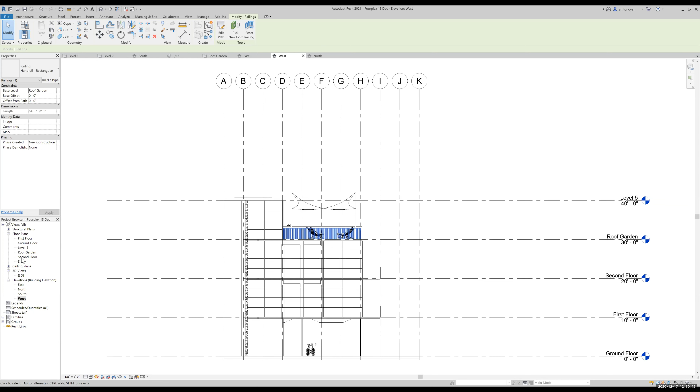The north is just a standard CMU wall. Later on, we'll customize it. I have a green wall on top of the CMU in order to make the common area a bit more beautiful. The western elevation. For the ground floor, it's kept open. I have a little area where you can keep your bicycle. The entrance, stairs, elevator.

And then this is my floor plan for the first floor. It pretty much follows the basic modular design. You have the kitchen, 10 by 10, kind of like a living area, a dining area. And then the second floor is pretty standard. You have 2 bedrooms, an office, a balcony, another restroom,

and then the roof with the canopy and the hangout area. Can you scoot back on this one just so we can see the whole model, and then go under your cube and just show us from multiple perspectives. I love your handrail.

It's loading. And I see that also your roof, you extended it on the other side. Mm-hmm, on top of the CMU.

All right, so for different views, we can do an isometric view. Yes, perfect, this. And we can do a closer isometric view. Beautiful, and you can see how the roof overhangs on the other side too.

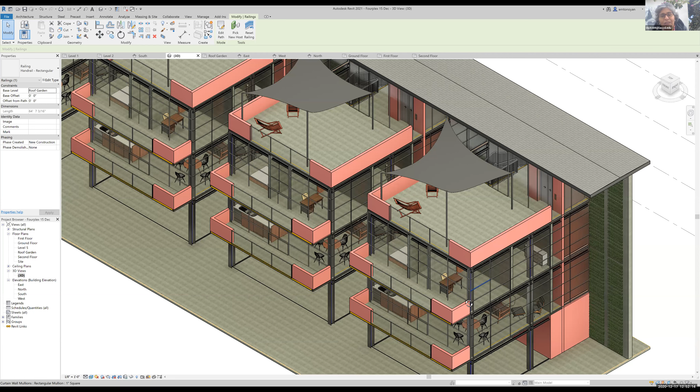So it's perfect for like experiencing the whole site. We're gonna put a running track around the site. Beautiful design. You can have a front view, which is a more detailed view in the 3D. This kind of gives you a better picture.